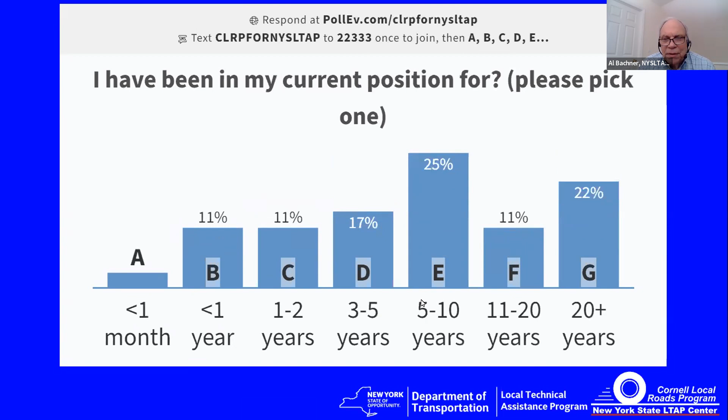And let's see what type of experience we have. So we got a bulk of people that have been working for over 5 years. That's fantastic. Now, this program is obviously a 1-hour presentation, and it's gleaned from our 6-hour class. So it's kind of the Reader's Digest version. And in the class, we call on a lot of participation and learn from the experience of our participants. If you have an opportunity to go to one of our in-person classes, we'd love to have you and learn from your experience as well.

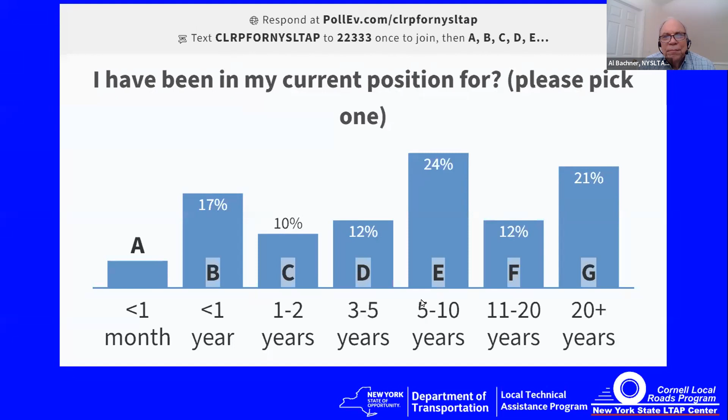And Amanda, I see that there's some things in the chat there. I'm having a tough time with the technology. If there's something I should be aware of, chime in and let me know. Yeah, we'll step in. Al, don't worry about it. Thank you, David.

So here we are. Why work zone traffic control? That's a big question today. I'm going to give that question to you and ask you, why do you think work zone traffic control is important? Saves lives, prevents accidents. Safety, that's usually the answer I get in class. Overall, that's like mom and apple pie. It's the overall umbrella answer.

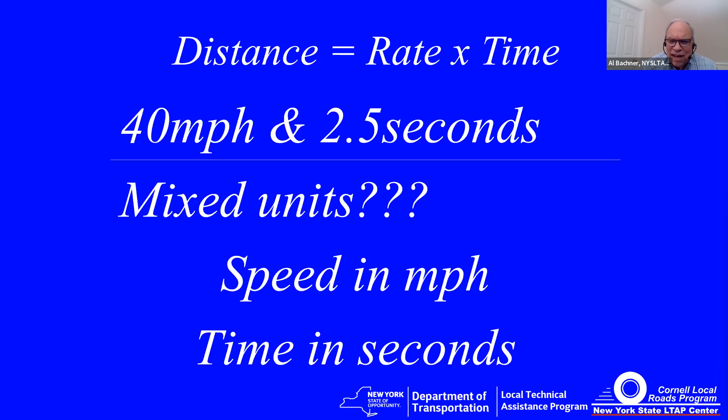Now, the question is, how far does a car travel at just a modest 40 miles per hour in 2.5 seconds? So that seems like a simple calculation. It's a rate times time problem. But it's 40 miles per hour and our time is 2.5 seconds. We have mixed units. The speed is in miles per hour and the time in seconds. So we have to do a conversion. Oh my God, this goes back to junior high conversions? 40 miles per hour to feet per second. How do we do that?

It sounds like a job for mathematics. Maybe we've got a simple rule we can follow. Write the speed in miles per hour, that's 40. Then write half the speed; half of 40 is 20. Add them up. We get 60. We've just converted 40 miles per hour to 60 feet per second. But the trick here is 60 feet per second is a little bit more than 40 miles per hour. Why is that? Slide.

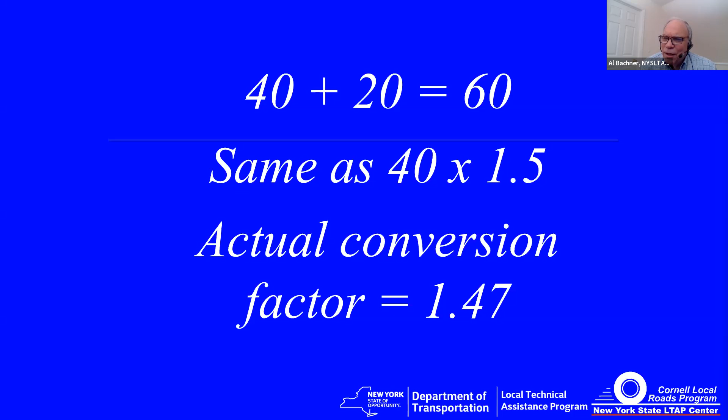Well, we took 40 and added 20 to it to get 60. And that's the same as multiplying 40 by 1.5, 1.5 being a conversion factor. The actual conversion factor, if we followed through all the units, would be 1.47. But we'd probably all round up to 1.5. So 60 feet per second is a little bit more than 40 miles per hour.

Slide. What's the distance traveled? If we're traveling at 60 feet per second, in the first second, we travel 60 feet. The second, another 60 feet. And a half a second, 30 feet. So in 2.5 seconds, the vehicle's traveled 150 feet. Now, are we going to have to do this calculation every time we want to set up a work zone or put a sign out on the highway?

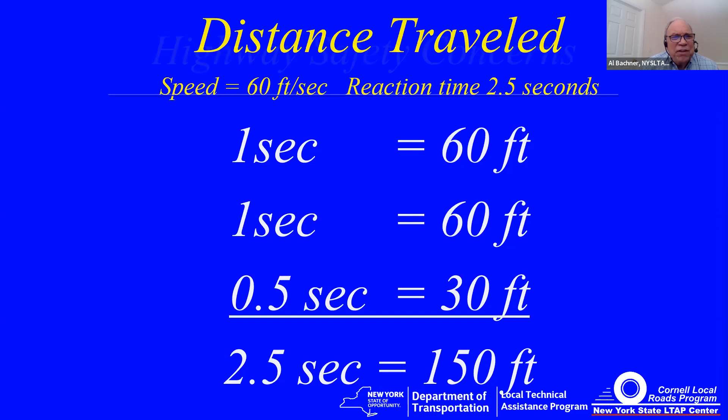Absolutely not. Those standards that we talked about earlier, why do we have them? Because they take this into account. So why do we go through this? So you understand why we put those signs out at some distance in advance of the condition, and you respect that. How many times have you seen a work zone with the sign just at the tailgate of the first truck? No, we've got to get those signs out and follow the standards. So now you understand why those standards are there.

Now, the highway safety concerns: traffic control, equipment operation, material handling, excavation safety. Equipment operation can be a simple task like a paving job. The rakers might be out there. Where do the rakers stand? They stand on the high side of the operation. On a standard 2-lane road, the high side is probably the crown of the road. When they pull the rake back, the rake handle will be going into the open lane. You have to be aware of that. Slide.

Traffic controls, we'll be looking at that. But first, we'll ask you a question. How can you minimize or eliminate problems in work zones? What do you think? Follow the standards. Good. Plan.

Okay. Well, you people have some good ideas. Oh, somebody wants to use automatic flagger devices. Okay. Obviously, we got some people who have some good ideas here. Very good. I'm impressed. Well, it's simple. I think you all captured it. Follows the established standards. Where do we find those standards? Let's take a look.

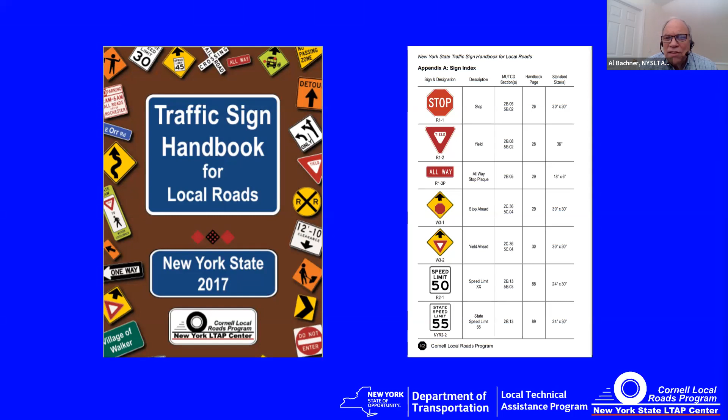Slide, please. Oh, this is an excellent resource. Cornell Local Roads puts out a traffic sign handbook. It's kind of a Cliff Notes version of the manual. If you're not familiar with the manual, one, you could take our class, where we take you through the manual. But if you haven't had the class, this handbook is a good resource, because if you notice in the third column, you look up a sign like the stop sign, it'll tell you what sections to go to in the manual. Slide, please.

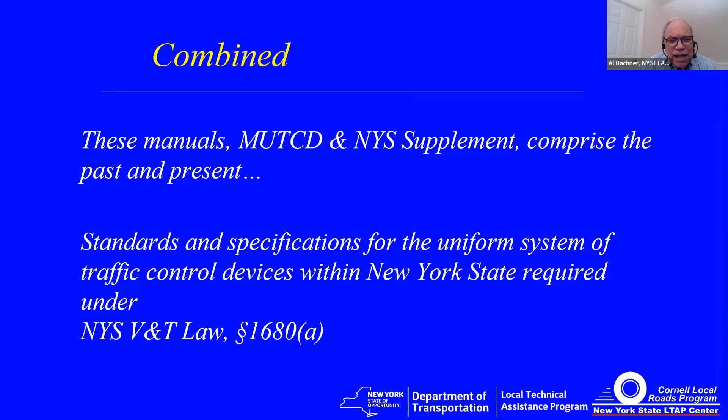These manuals provide the standards that we need to follow. And it's not just a good idea or just a resource. Actually, under New York State V&T law, section 1680A, it's actually law, and we are obligated to follow it. Now, since it's a law, the words we use in law have very special meanings. And we'll find the words in the manual: standards, or shall. That's an absolute mandatory condition.

So when the manual says a stop sign shall be red and have 8 sides, we have no discretion. A stop sign shall be red. No discretion. One village on Long Island, the mayor wanted to put up yellow stop signs because it was a historic village, and he may have felt that those old stop signs would give it a nice cutesy look, but was not allowed to put them up because the stop sign is a shall be red.

Then guidance, you'll see the word should. If you're looking to put up a curve warning sign and it says it should be placed 200 feet in advance of the curve, and you go out there and pace that out, and 200 feet comes out in the middle of an intersection, well, that's not a good place for a sign. You go back to the manual, it says should, or guidance, so you have some discretion to move that sign in advance of or after the intersection.

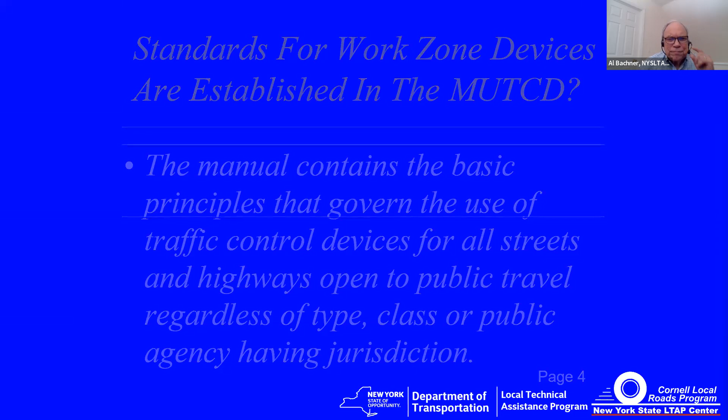So what are the devices we have? These are the tools we have. Signs, traffic signals. Now, not too many control traffic signals. And when we have our 6-hour class, we go into a little bit more on that. And many of you are out there just for a short operation. You're not going to change pavement markings.

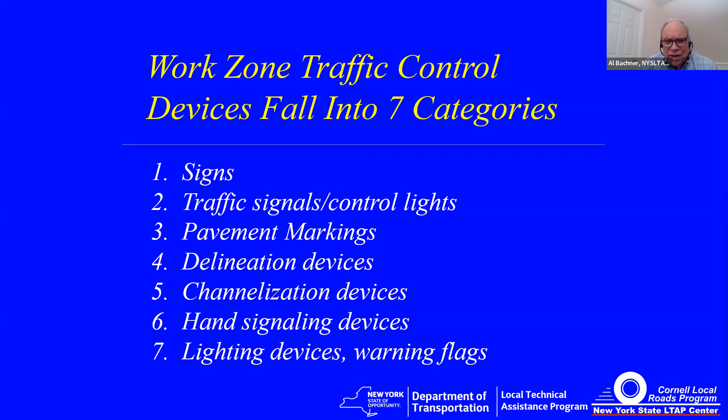So we got to think about how we can use delineation or channelizing devices to have vehicles violate the pavement markings. And in our 6-hour course, we have an afternoon section where we cover flagging, and we go more heavily into the hand signaling and lighting and warning flags. Slide, please.

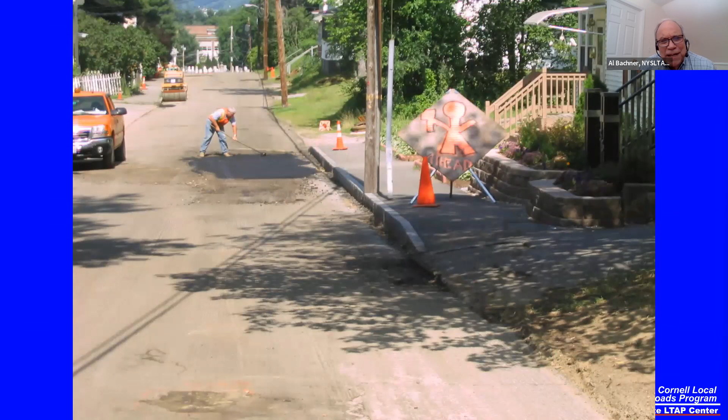Next slide, please. We all know what a new device looks like, but is it acceptable? Is it marginal, or is it something we absolutely shouldn't use? Now, ATSSA puts out this guide, and what this guide does is it takes the words from the manual of what's acceptable, marginal, or unacceptable, and it puts it into a picture format so we can make that call.

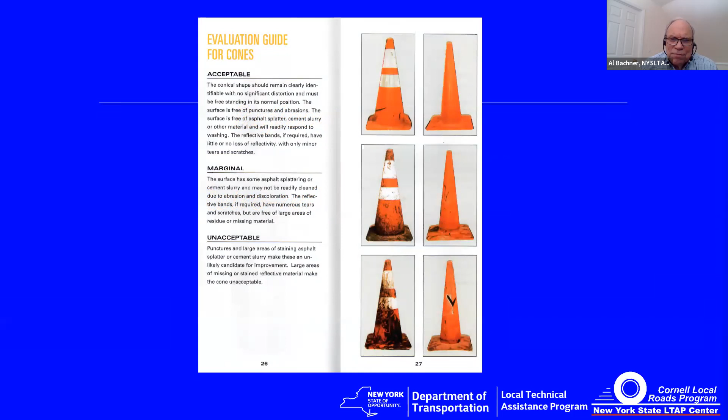And here we have some cones. Now we have 2 columns of cones. What's the difference between the 2 columns of cones? One has white stripes on it, the left column, the right column doesn't. Why do we have that? Well, the right column is for daytime use only. The left column has those white stripes. That's okay. Slide, please.

And some of us say that they're reflective. Others say they're retroreflective. What the heck's the difference between reflective and retroreflective? Slide. A mirror is reflective. Here we see an incoming light beam. It strikes the surface of the mirror. The incoming light beam makes an angle with the mirror, and the beam leaves the mirror at the same angle. So that's shown in this slide.

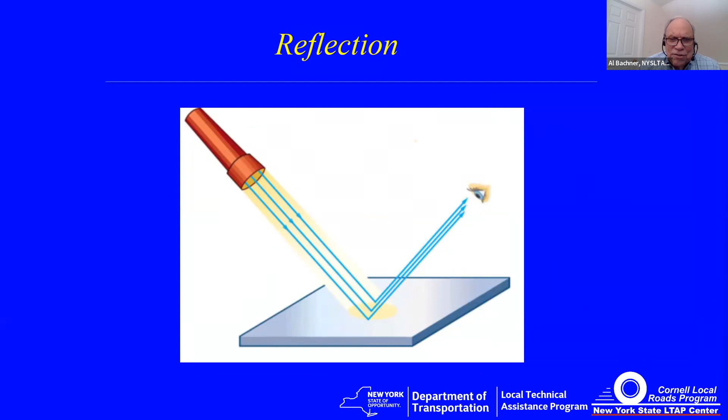Next slide, please. This is retroreflective technology, and this is from glass beads. And the physics of it shows us a light beam coming in, and it's moving from one medium, air, into the glass bead, and the light beam is bent. That's called refraction. Then the light beam hits the back surface of the glass bead, and it's reflected. And as it comes out again, from the glass bead to air, the light beam is again bent. It's refracted.

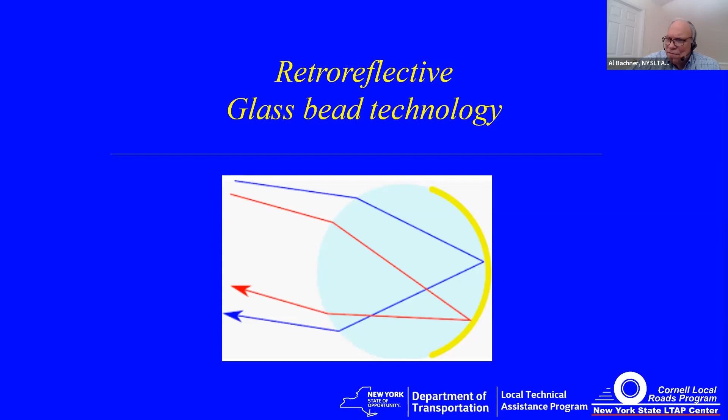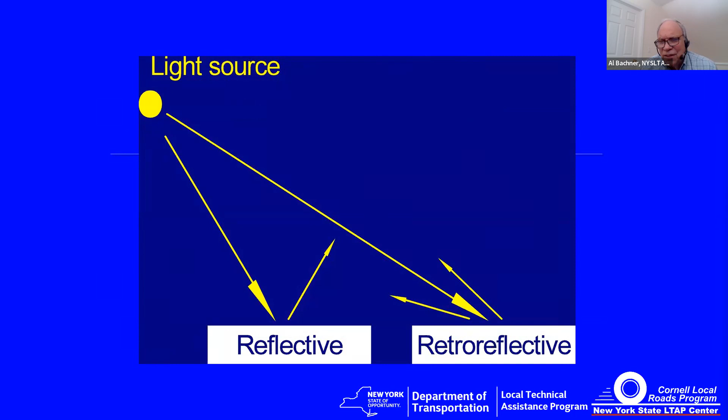So the physics of the light. And here we can see reflective compared to retroreflective. If our signs were reflective, the beam of light from the headlight would hit the sign and light up the roadside. But our signs and our devices are retroreflective. Slide, please. The headlight hits the stop sign. It bounces the light back towards its source, and right behind the source and above it is the driver. So we use retroreflective materials in our roadway.

Slide. And let's take a moment to look at worker safety. Workers must be seen. Hit the, there you go. A big animation. And we're obligated to have our workers highly visible. So we use ANSI class 2 or 3. Typically 3 should be used for nighttime exposure. Let's hit the slide, please.

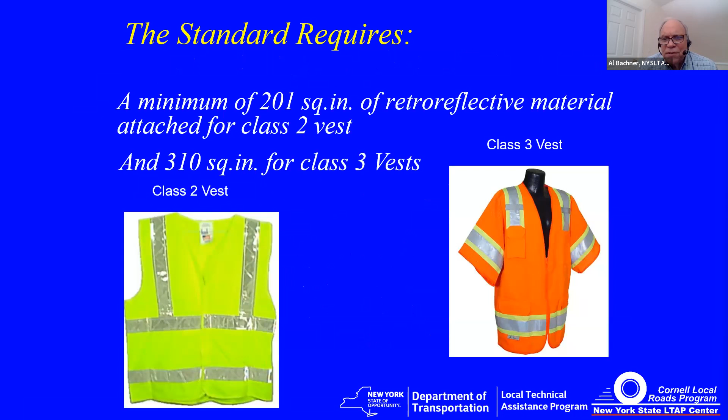Class 2 and class 3, what's the difference? The amount of square inches of retroreflective material. And if you're a very small person, in order to get the class 3, you might actually have to wear retroreflective slacks.

So why do we provide this? Why does the manual make a standard? We want to make sure that the workers can be seen in a complex work zone, and they can be seen during daylight or nighttime. So hit the slide, please.

Oh, maybe you better back it up. Okay, back it up. Another one back. All right, there's a timed slide coming up, and what we want you to do is count how many workers you see. So hit the slide, please. Okay, hit the slide.

And if you look, you'll see that there are actually 7 people that we can see in this photo. One is up in the cab of the truck on the right. What's obvious though, is that the workers that have their vests on can be picked up very, very quickly. The police officers that are out there, they have sidearms and they don't believe that they need to be visible. But actually, they have their own vests, and they're obligated under the manual to follow the work zone safety rules as well, or standards. And you can see that you didn't pick them up as quickly.

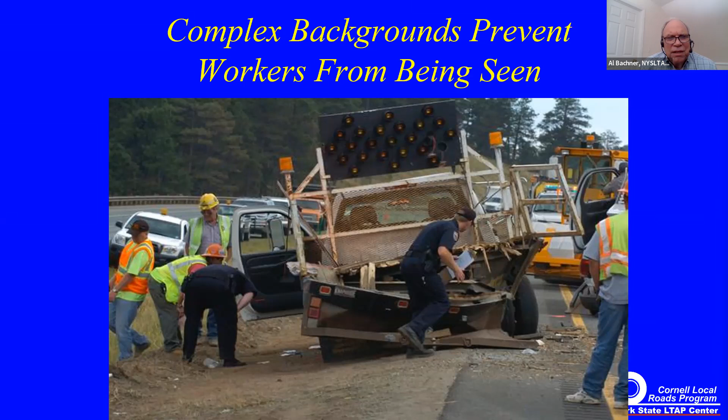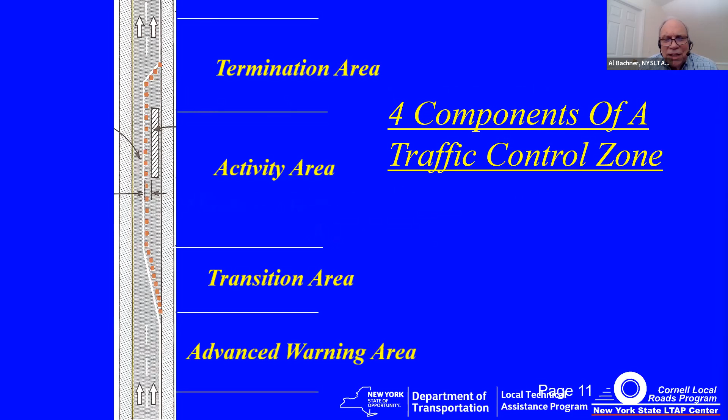Next slide, please. The work zone. What are the areas of the work zone? The old manual had 5 parts. The manual we currently use took those 5 parts and condensed them down to 4 parts. And we'll take a look at these 4 areas in detail now. The advanced area. This is where we tell people that they're going to be coming into a work zone. We want to get their attention. We space out the signs to give them time to react, and we can adjust for field conditions. And usually we use 3 signs. General warning, specific instructions.

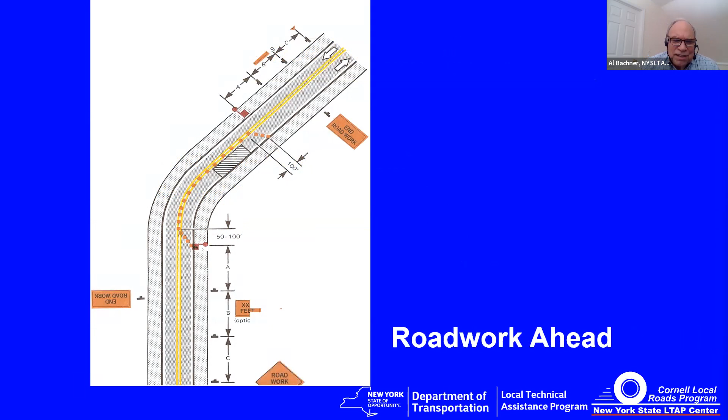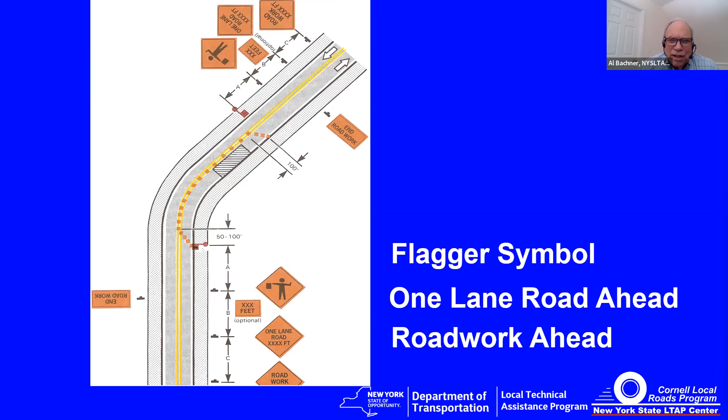Let's take a look at this. We'll consider up the screen north and down the screen south. We're closing off the northbound lane. So we put in the first sign, general warning. The second sign gives them more specific instructions. And the third sign, we tell them what to do. And we have to also post those signs. Look up in the top of the slide. We post the signs for southbound traffic.

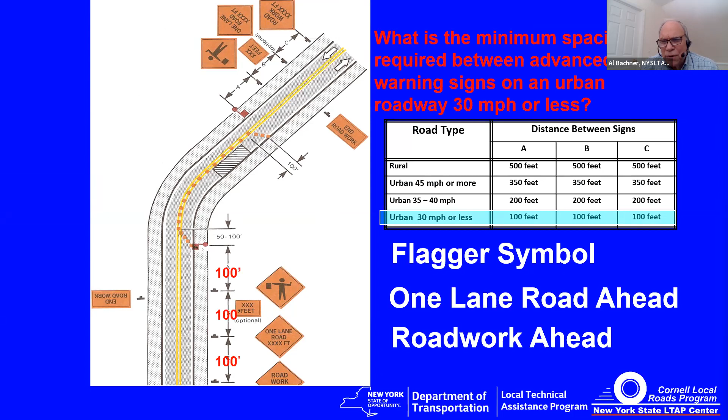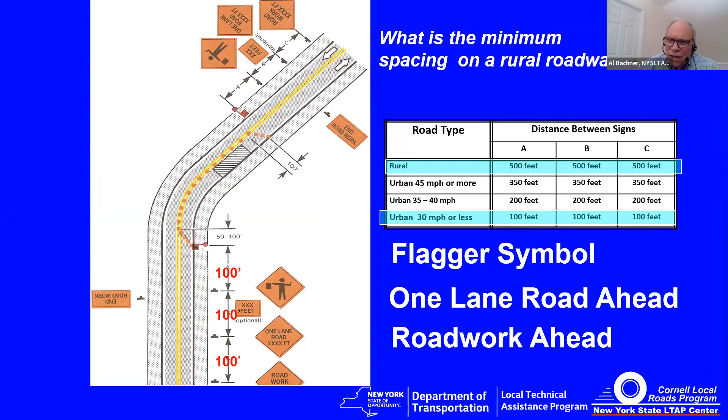Now, there's different posting. What do we do in a low speed area? They're posted 100 feet apart. What do we do in a rural area? We post them at 500 feet. Those are all found in the standards.

Let's take a look at how we're going to set up our work zone. When we're setting up our work zone, as we're putting those signs up, we're actually working out on the highway. So what we do is we start with the most remote sign first. And after we get that up, that's giving us some protection as we put up the second sign. You'll notice that signs are being installed in the upper part of the slide. There's our third sign. Then we drop off our flagger. Get the flagger ready to set up. Then we go up the roadway. We put up the end roadwork sign.

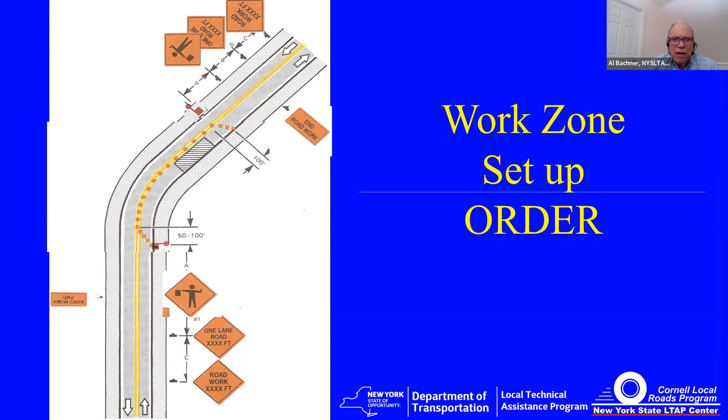Then we turn around, and we're coming back into the section where we're going to close. We put up the first sign. The second sign. The third sign. We get our flagger ready. We set up our cones and we put up our end roadwork sign. And now when we're going to take it down, we do it in reverse order. So the signs that we're putting up are providing safety while we're out there working.

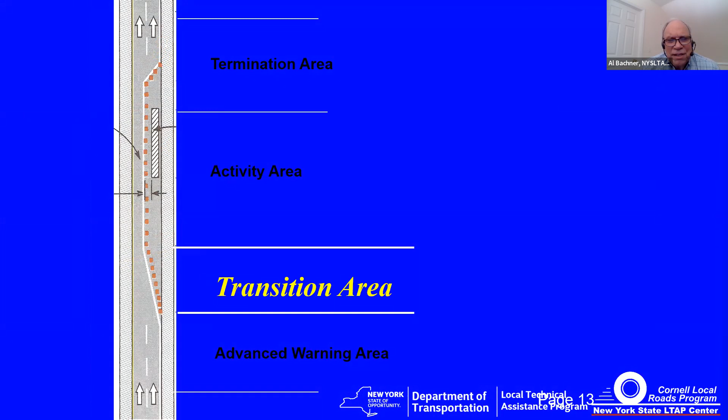Here's our general warning area. We're looking at a limited access highway. Specific warning. Specific instructions. Take a look at the transition area. Here we have cones set up. We want to move traffic. We want them to violate the pavement markings. So we have to provide good guidance for them.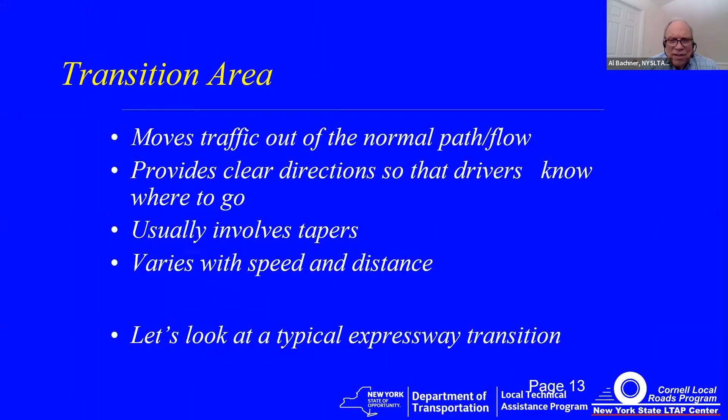Click. We have a shoulder taper. We're working on a shoulder. We use a length of L/3. Then two-way traffic taper, let's click on that. And that's in this condition, and that's a maximum of 100 feet. 100 feet, we use a 20-foot spacing between the cones. So 20 into 100 is 5, plus 1 cone for the end. We need at least 6 cones for the taper.

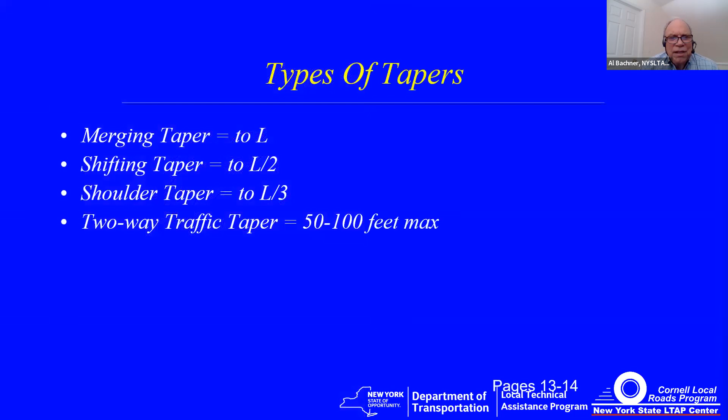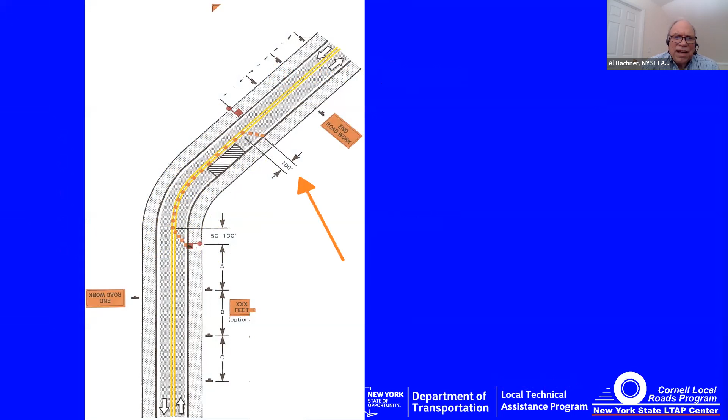And we want to put in that abrupt taper to show the motorists that the lane is closed, but not encourage them to move over to the other lane. If we put in a long taper, we would almost guarantee a head-on collision. Click. We have the downstream taper. Click. That's 100 feet. Where's that? That's, click, there it is at the end of the work zone. Click. Click.

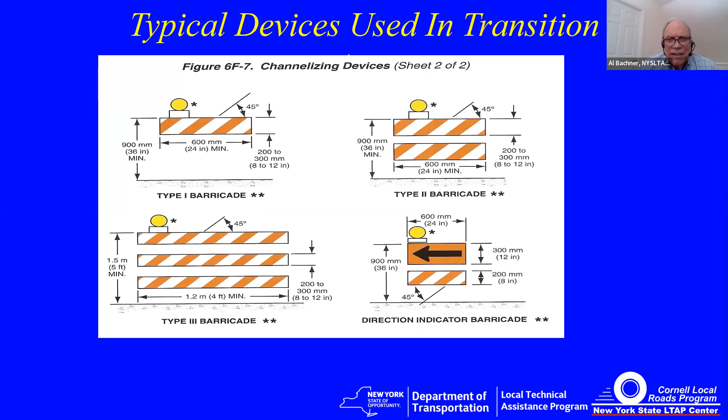Devices used in the transition area. These barricades, let's see, I'll give you a college education here. First one's type 1, move to the right, type 2, and type 3. I imagine that you can notice that the zebra striping is slanted on this. Notice the arrow is pointing to the left, click. That's because the way the stripes slant down is the way traffic should pass, to the downside of those stripes.

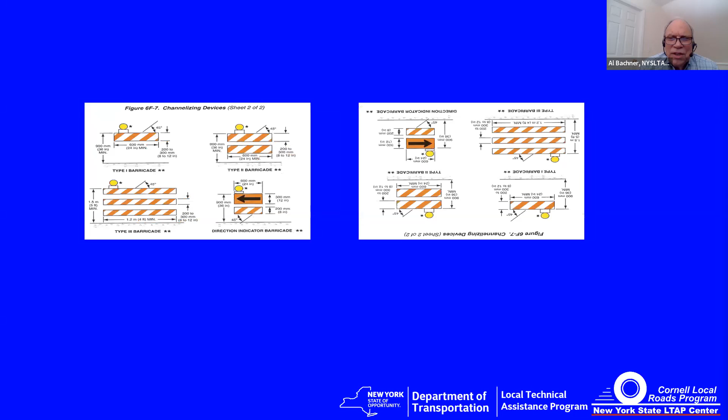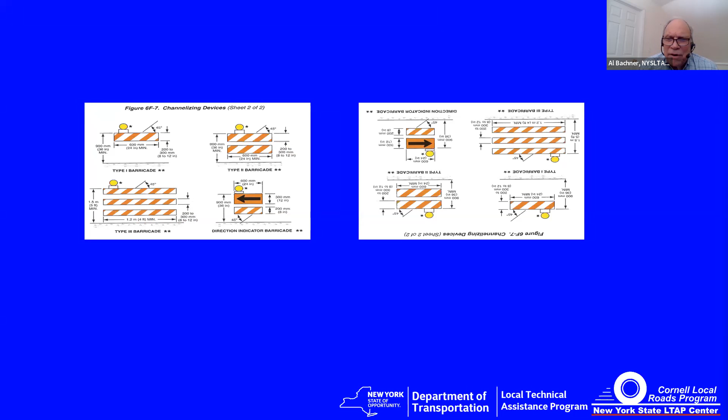Click. So let's click. Let's take these 2 slides. Click. Let's take the slide on the right and flip it over. You'll notice the slide on the right is upside down, which is the same as taking those barricades and putting them upside down, but the stripes still slant down to the left. So when you're ordering barricades, there are left barricades and right barricades.

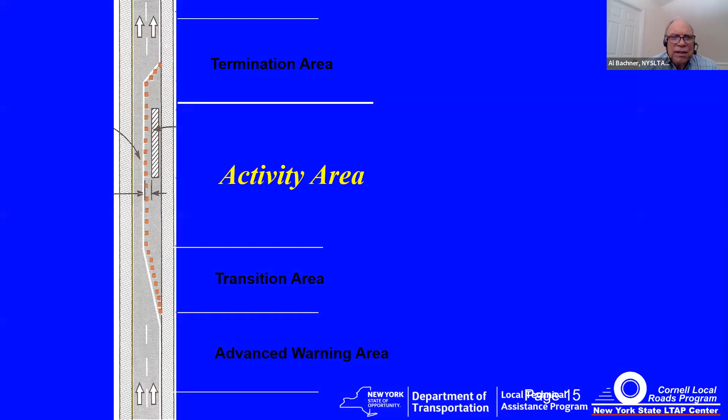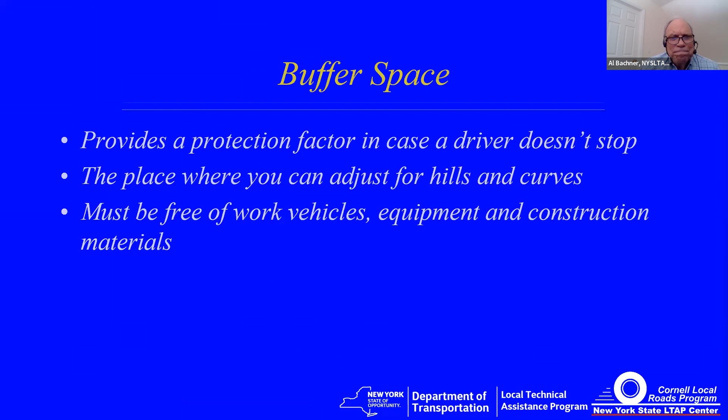The buffer space, it provides a place for the vehicle that makes a mistake so they can enter it and not hurt anybody and not hurt themselves. So it's got to be free of everything. It's empty. Go ahead, click. And its length is mandated by what the speeds are. Click.

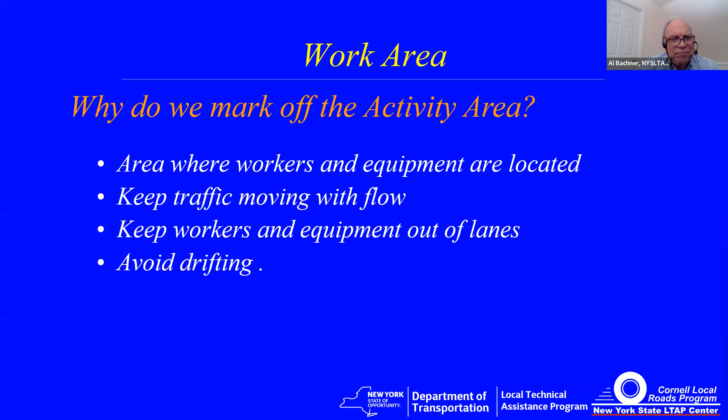And the work area, what we want to do is we want to mark that off to define where traffic can flow around it. And an important element is that workers and equipment know that they are safe, or safer, when they stay within that. So workers, when you're leaving that work zone, when you're stepping outside those cones or barrels, you've got to pick up your head and take a look for traffic. Click. Click.

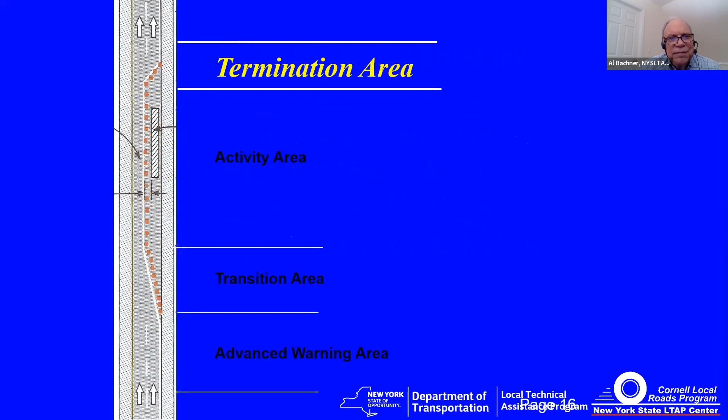And the termination area, that just lets the driver know that they've left the work zone. Click. Click. Now, let's take a look at this. Go ahead, click through it. Click. Click. And this is showing us set up in an urban area.

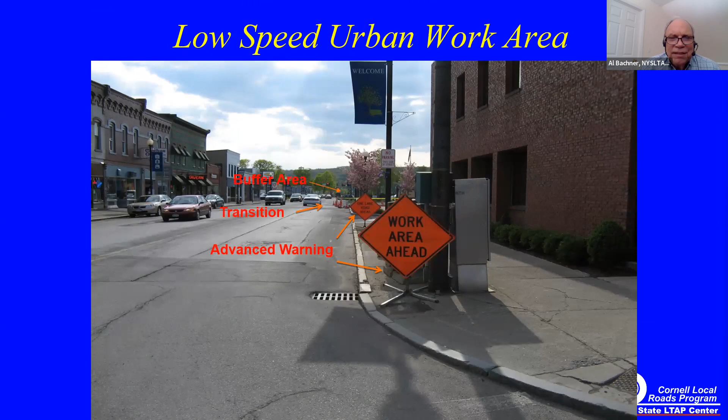Click. Can you see what's wrong with this slide, or what's wrong with this setup? If you look at the second sign, it says it's a 1-lane road. Well, they've either opened it up and forgot to take down the signs, or they're lying to us. If you're setting up a work zone, make sure that it's giving good information to the public. Don't just use signs because, oh, this is the sign I have, I've got to put it out there. Click.

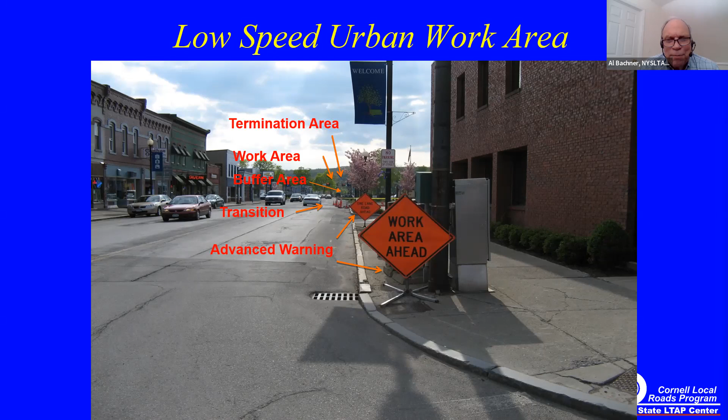All this information is available in a pocket guide. And that pocket guide's available from Cornell. You have the contact information from Cornell. You can ask them to send you a hard copy of the pocket guide. Something else you can get is our app.

Okay, why do we need a temporary traffic control plan? Because it may give us a wake-up call. We think about what we're doing before we get out there.

Click, click. Oh, we didn't. You should be hearing beeping, beeping, beeping. And I guess we left that slide. You didn't want to show that one, Amanda? I didn't hit the button to share the sound. Okay, well, just go back to it. Go ahead.

Click. Beep, beep, beep, beep, beep, beep.

Oh, it was a backup alarm on a truck. Okay. He didn't realize what he had. Click. Let's take a look at a work zone.

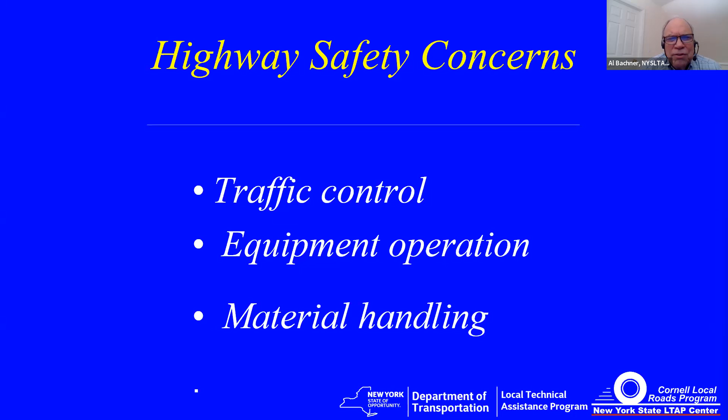So let's click here. And what we have is there's a municipality and they're going to be paving that north-south road. And the way the paving is set up, they're going to start the paving on the north end of the road and work towards the south end of the road. That east-west road at the bottom of the screen, that's where they're staging their equipment. And they're putting up barricades along the south end of the paving road, the work road.

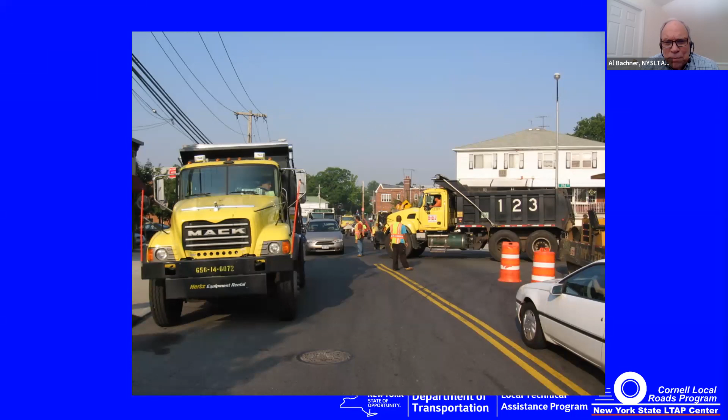So let's click here. This is the east-west road. We're looking westbound. We can see that this is a busy arterial. There's bus traffic there. And the 123 truck that's coming out of the road that they're paving on, the truck that's on the left that's waiting to back up and deliver asphalt to the paving machine. There's stores on the left. Click.

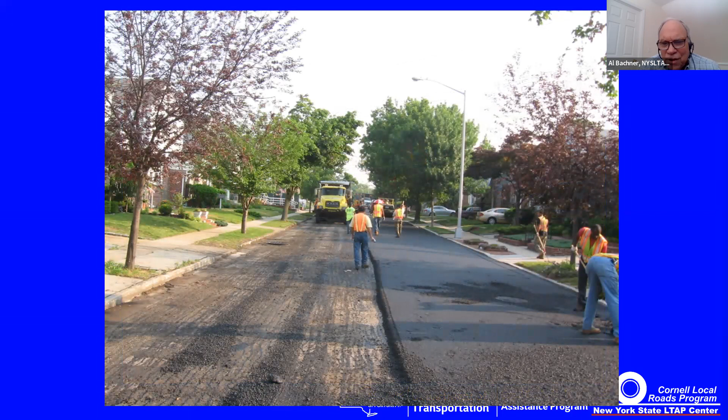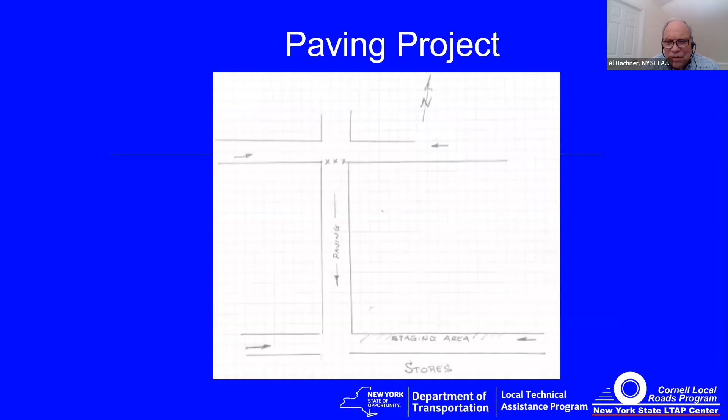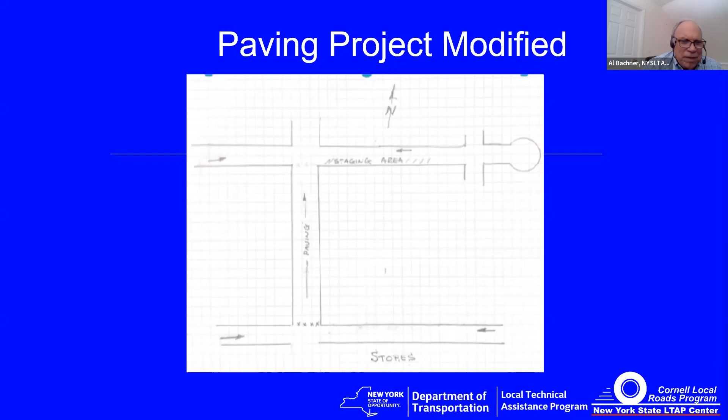Click. Maybe we could have modified the plan. Might have been better to close off the work roadway at the south end and pave going northbound. And then we could have used that east-west road on the north side as the staging area. And one thing to note is that's just a quiet residential street that actually cul-de-saced. So very little traffic, very little interaction. We wouldn't have closed down the business area. We wouldn't have had our work people standing out on a busy highway.

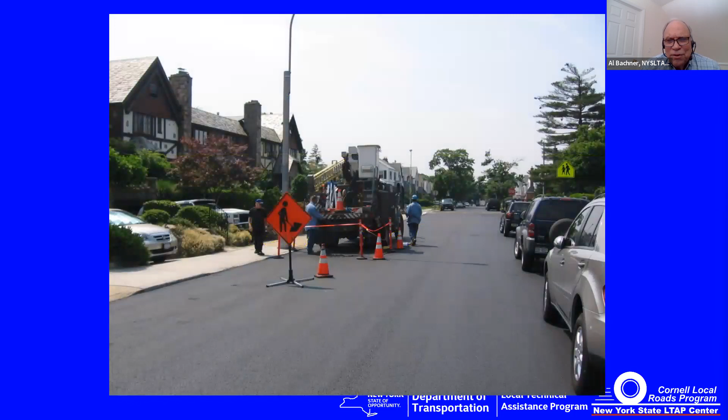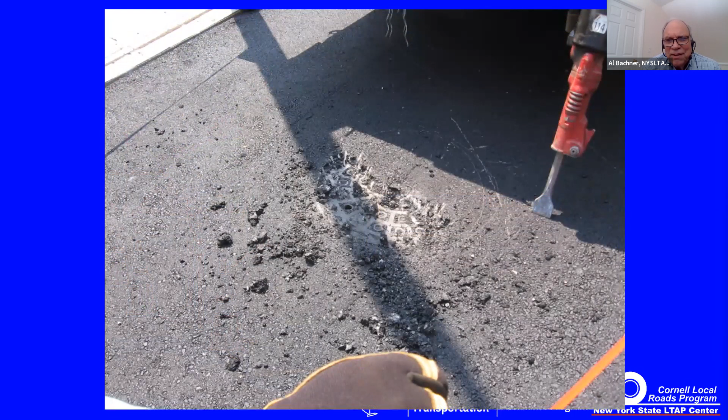Click. Same paving project later in the day. Click. Oh, somebody else is back there. What are they doing? Click. It's a utility company. Click. And what happened was when the paving operation went through, even though they put in adjustment rings, they paved over the manholes. So this crew actually followed the paving crew around on every one of their jobs.

And this is ridiculous. Why are these people working out there? Why didn't they just embed a person with the work crew to make sure that they did a good job at cleaning off these utilities' manholes?

So if we would have planned this out better, we could have saved this crew from coming back, and we could have kept our crew safer. Click.

And this young girl, Alexandra, was walking along with a friend, but they were chatting and texting, and she stepped into the manhole and fell about 5 feet into the manhole. And of course, there's now a liability. And unfortunately, what they did is, we're only going to be a couple of minutes, and they didn't put the manhole cover back or cone it off. So think about what you're doing out there. Slide.

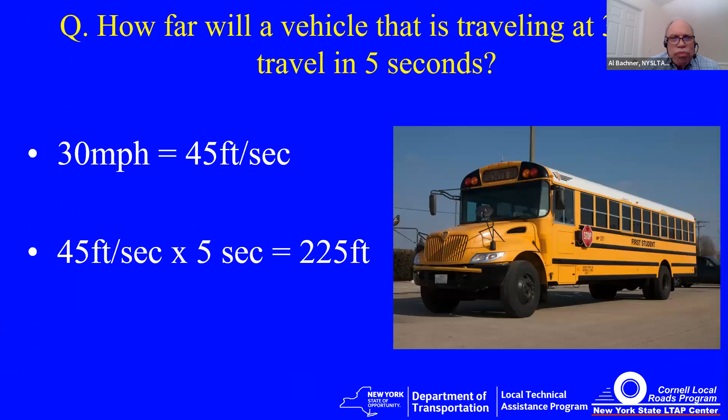We're still getting the sign colors. Okay. Okay, there's a common mistake there. Okay, it's Manual on Uniform Traffic Control Devices. There you go. We got it. Okay, Manual on Uniform Traffic Control Devices. MUTCD, M-U-T-C-D. Okay, next slide, please.

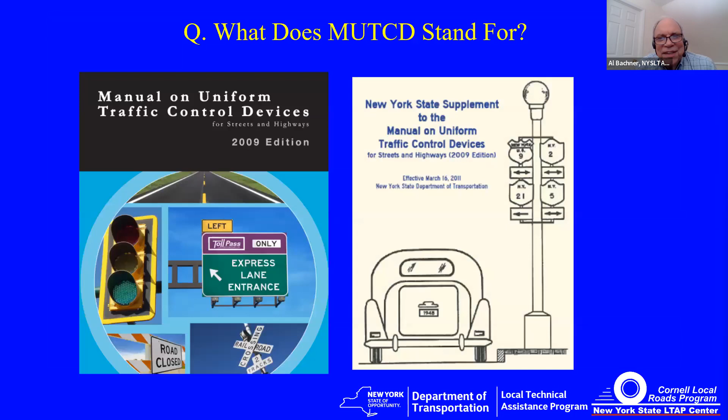And technical assistance, the Cornell Local Roads will be putting on some more programs. If you look at the packet that they sent you, there's more webinars coming your way. There's a lot of resources, booklets and training material, and the packet they sent you gives you information on how to download a digital copy of the MUTCD, the New York State Supplement, and the sign handbook. And David, I'll turn it over to you.